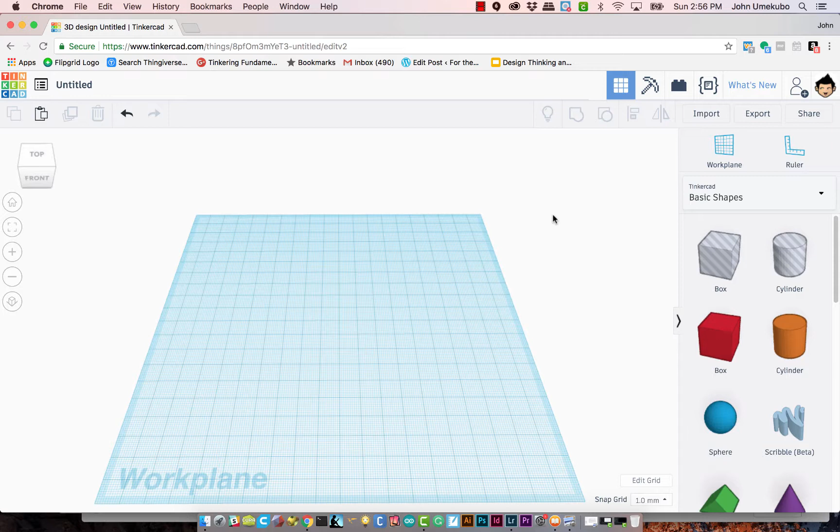So the second new tool that was announced a few weeks back by Tinkercad, in addition to Scribble, is the part collecting tool, or I think it's called part collection tool. And so by default, you go to the basic shapes tab, and you'll see down below something now called part collection. And yours, if you're watching this video, you probably don't have any parts yet, so this part's blank.

But what it essentially allows you to do is create something of your own and then add that to a collection that you save here, so that anytime you're working on another project, you can pull that piece back out. And what's particularly helpful, I think, is that you can tell it not to allow resizing or reshaping of this part. So for example, recently I did a project with what I'm calling LED caps,

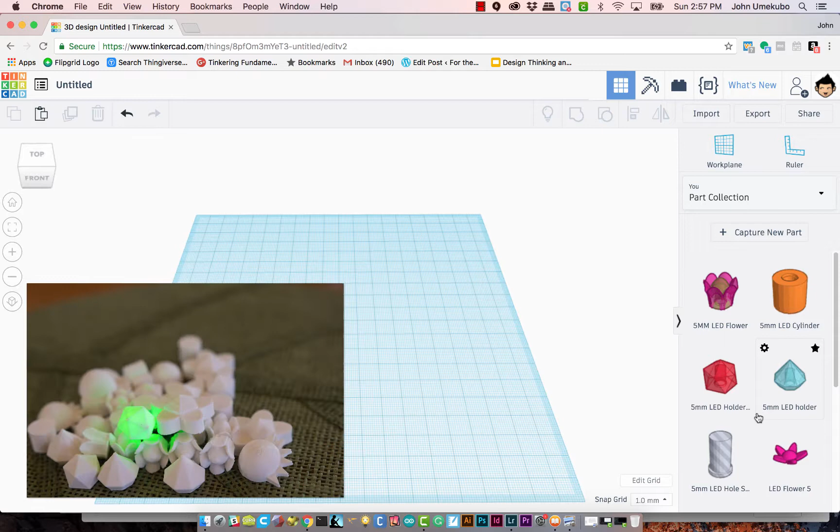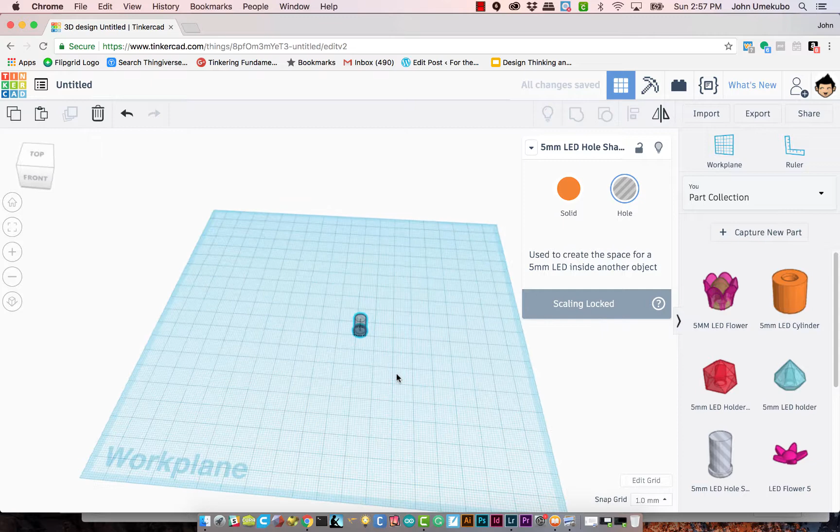and they are ways to create small shapes that can fit over the top of an LED. And it gives the LED more volume and more glow to it. And so I created a bunch of these little caps that I put in my part collector. But one of them here is the actual hole that the LED would actually fit inside. So now I've created this as a part. I've locked the scale so you can't do anything with it other than leave it there and put parts over it.

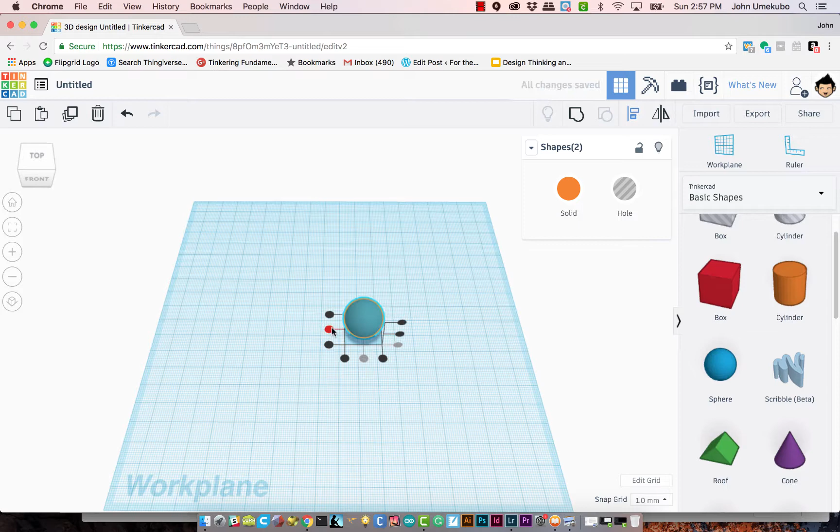So if I go back to my basic shapes and I take something like this sphere and I line these two things up, I'm going to use my align tool and I'm going to align their centers that way. All right. And if I group them, what's happened is I'm going to turn this solid into a transparent solid for a second so you can see what happened. So now I have this sphere with a hole in it that will fit an LED. And so now, once I print it out, I can put it on top of an LED and it will look like a glowing orb or something like that.

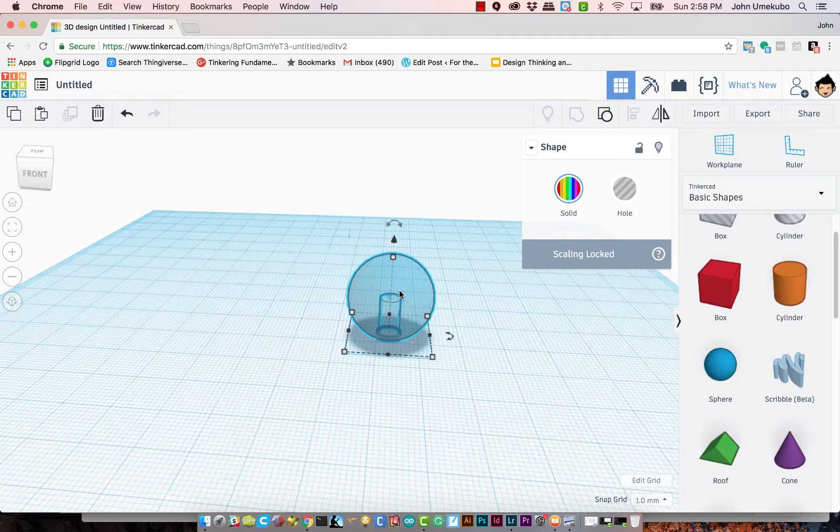So I can take this new shape that I've created and I can go to my part collection tab and I can capture a new part. And by doing that, I click on here. It's because I've selected that part. If I had multiple parts on this work plane, it would have taken the one that I was clicked on. In this case, there was only one. And I'm going to name it.

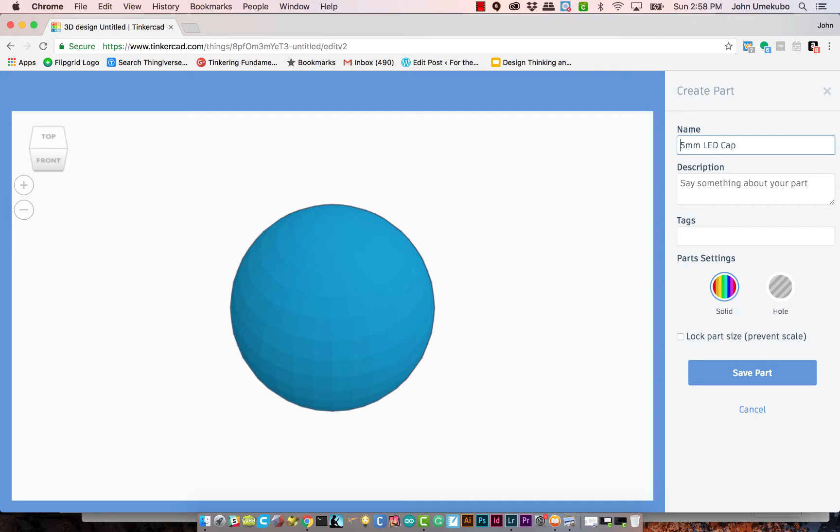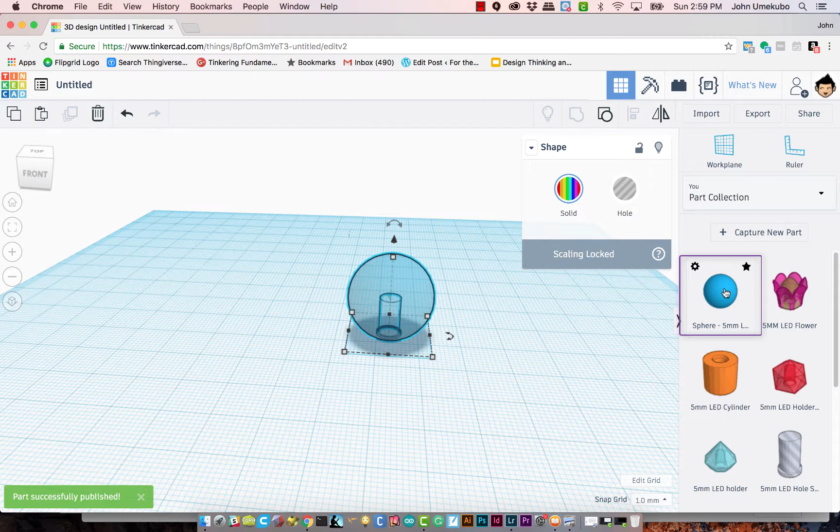So I'm going to say 5mm LED cap, and I'll call it sphere. Something like that. And I'm going to say for use with 5mm LEDs. Something simple. And I'm going to lock this part so that this cannot be resized. And hit save. And now it's part of my collection. And I can use it in anything else that I'm working on if I wanted to bring this particular type of part back into play on a new project. All right, that is part collection.